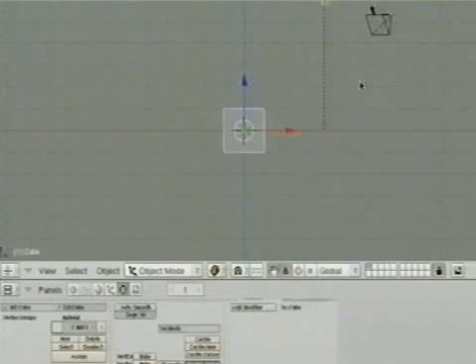In the meantime, starting from this empty blend file. So just to add an armature, and I think I'll do a foot setup, which some people might like.

Yeah, I will. Yeah. Okay, well, I'll do that.

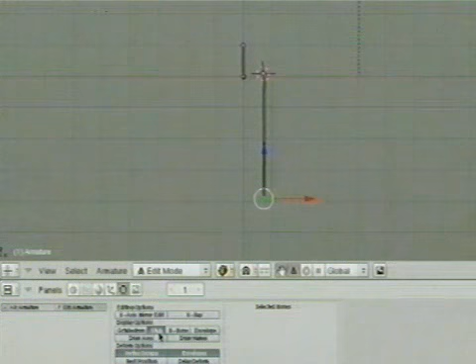Solid drawing modes for bones, and actually several options. So you have stick mode, B-bone, envelope, and that's it. Octahedron is the old way. The only difference is that now it's drawn shaded, and it has the same options for drawing modes that everything else does. So you can make it go back to the old wire way of rendering things.

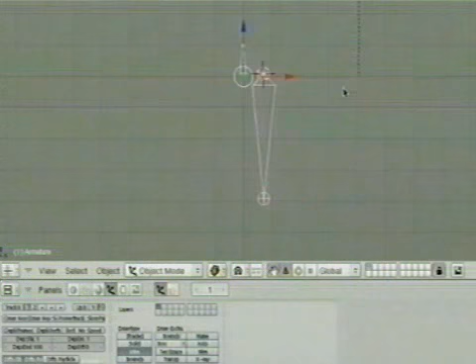You can also have X-ray. You can have X-ray for any object now, not just bones. So you can have X-ray meshes that appear in front of what they're behind if you want. I'll go back to solid for now. X-ray's fine.

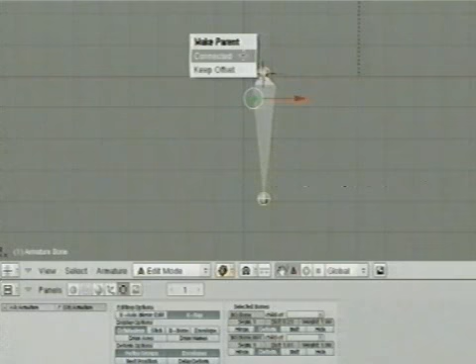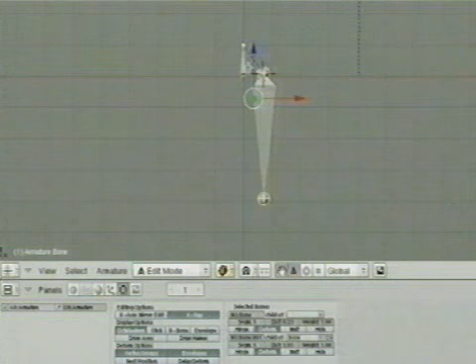So I'm going to make this bone the child of this one by shift selecting it and doing Control P in edit mode, and I want to keep offset. That's also new. So it's as easy to parent things in edit mode in bones as it is in object mode in Blender normally. A lot of the things that we're used to in Blender working for objects now properly work for armatures in both pose and edit mode. So snaps, view centering to a bone, etc. It all works nicely, which is a big plus.

You can also subdivide a bone, which I'll do here. So you can keep on doing it. I'll undo that. So here's our top and bottom part of the leg. I'll go to the side view, and I'll just move the knee a little bit forward.

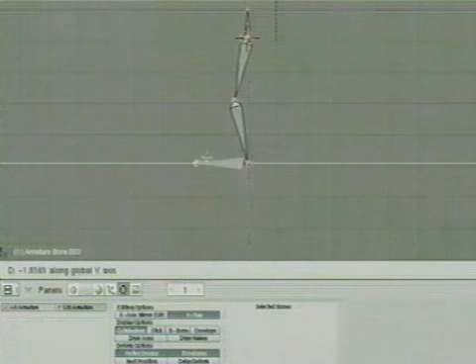So that's the leg part, and we can extrude, and you can use snaps while you're extruding normally. I won't for now, and you can extrude out the foot and extrude out the toe portion of the foot in front. There we go. And so that's the basic geometry bones that the character would have for that leg.

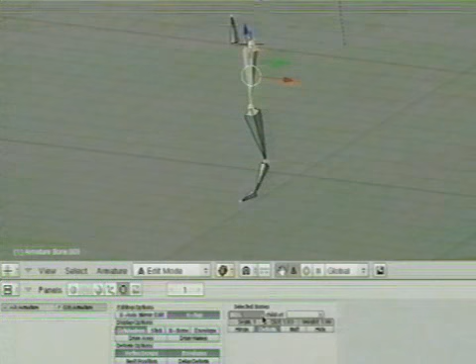You get the upper leg, which I'll call left up leg, and the lower leg. This is the boring part. Left low leg, and the foot stuff. Again, left up foot. Oh, here's something cool actually. You can hit Control C on top of a button, like a text button in this case, and then you can paste that onto a similar button. So you can quickly name things that have similar names.

Yeah, most buttons. You don't actually click on the button to type on it. You just hover the mouse over it. You do Control C, and then you go to wherever you want to paste to. Hover the mouse over it. Control V, and it tacks on the .001 ending. So I can just go and rename this to low foot or whatever I want to call it. Okay, so there's two parts of the foot.

So this is ready to be animated in FK, but we'd like to have an IK chain for the foot. And foot IK is kind of interesting because you want kind of two pivots as you work. You want to be able to stand up on your tippy toes, and you also want to be able to push off with your heel. And so you have kind of two or even three pivot points that you can think of for the foot.

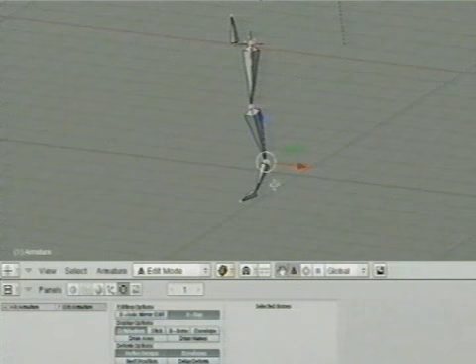You have the ankle here, which pushes the leg up, and then you have, down below it, in this area, the heel of the foot, where your foot kind of pivots off the ground, and then you have the ball of the foot, the middle part, when you're just standing on your tiptoes. And you kind of need to have at least that much flexibility in the feet to have some kind of realistic walk or jump or whatever.

The rig that I use is based off an old one, I think Lubomir did it in Blender, which is just a nice setup for that kind of thing. The one thing that I didn't used to like about Lubomir's setup was if you pulled with IK normally, if you pull the target too far away, the bones try to chase it and stay hanging in space, not able to reach it.

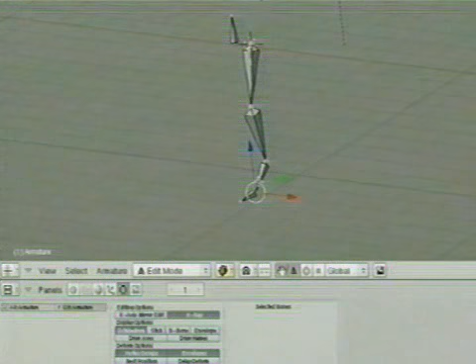In that setup, everything was cool until you pulled the foot out of range, and the foot would move with the target, and the leg would sort of point, resulting in this stretchy ankle thing, which isn't as bad as it sounds, but I kind of liked to have something that didn't do that and also had easy control over everything.

And so I just did a little bit of sort of duplicating and hiding to get the thing to work. So the first thing we want is an IK target for the leg, up to the ankle point. And I'll just snap the cursor here and add a bone. And you notice adding bones is different than it used to be, and it's actually much more intuitive and nicer.

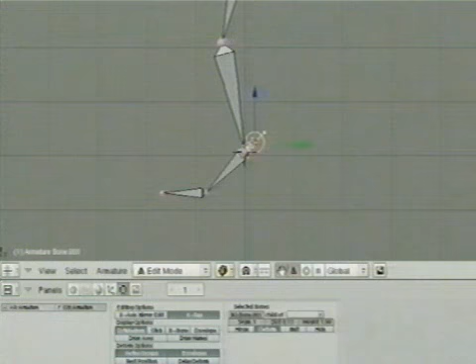And so you can just move this point, which is selected right away. And so this is just the null. It doesn't matter where that point is. So if you go into pose mode, Control Tab, you can select this bone, which is already selected. Then you can Shift select this bone, and you can do Control I, and it automatically will give you the option to add an IK constraint, in this case with the selected bone. And so now this is drawn yellow, showing that it has a constraint on it, that it's IK.

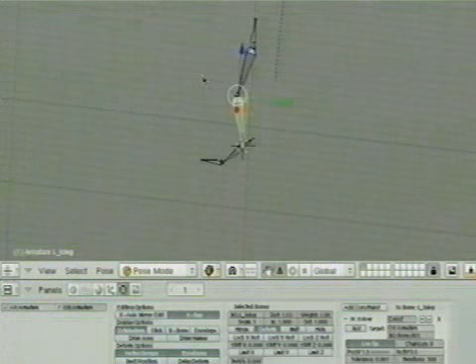And you'll notice there's something called chain length here. And if you look at this dotted yellow line, it's showing where the root of the IK is. And if you have a really big armature, that will go all the way up by default to the topmost parent, even if it's not a connected bone. So IK actually works across bones, even the ones that aren't connected.

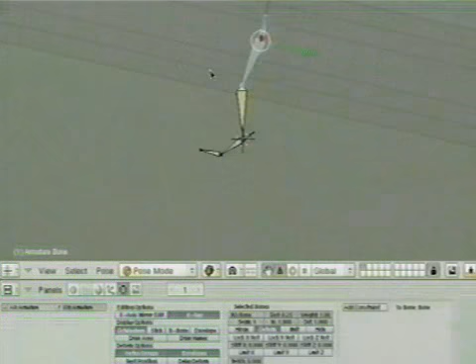Let me just make sure this is child to this, and we'll see that the yellow line goes all the way to this bone here, which means that if I move this, it affects the hips, which is not the old way of doing things. It would have stopped at this bone here, and this bone wouldn't have moved at all. And in this case, I don't really want that. I kind of want to keep my IK just with the legs and have the hips as a normal parent.

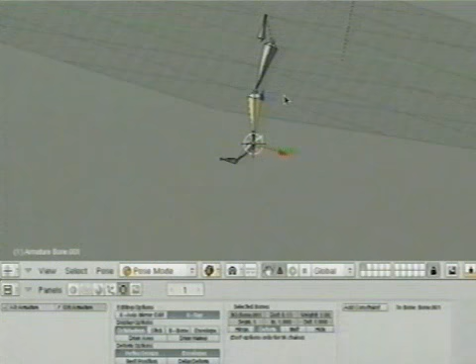And so you can just go into the IK panel here for the constraint and change the chain length, and you can make it end wherever you want. 0 means infinite, 1 means just that bone, and then 2 is that bone and its parents.

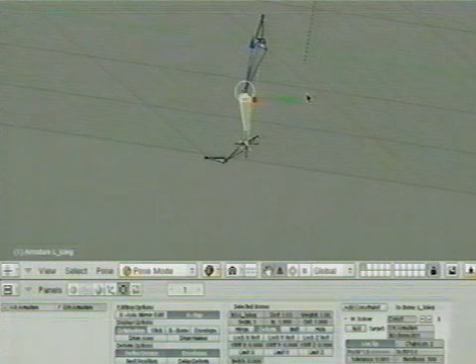You'll also notice what's new is that I don't have a null at the end of my chain for the IK anymore. The IK has a use tip option. We can see checking it on and off. So if you do use tip, it IKs to the tip of that bone, and you don't need a little extra fiddly bone at the end that you're just using as a null. That's nice. So that's the first step.

We have an IK for the foot, which works, as it always has, nicely. Okay, the foot itself we haven't done anything with, so it's rotating around. But the leg and the ankle are working fine. So the next thing, go back into side view, is that we want to pivot off the heel. And pivoting off the heel is as simple as making a bone here at sort of ground level, roughly.

So I can snap my cursor. I can even just copy this bone over and drag it over here, roughly where I want the heel to be. And deselect that ball and just make it going backwards. This is the little heel pivot right here. And I don't want it to have any parent. I just clear parent, like normal in Blender, it just works in here. So let's make sure that worked. Yeah, that didn't work, I guess.

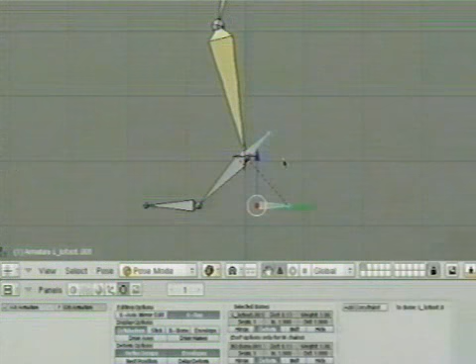Now I want this bone to be parented to this one, so that when we rotate the heel around, it pushes the ankle over. So I'll just do this, and Control P, and I'll keep the offset, and now I have a parenting relationship nicely. And so go back into pose mode, and I can rotate off the heel. Okay, still things aren't working quite right, but we're kind of getting there. So now for the next step.

So, by the way, pose mode is now sort of, once you turn it on, it's always on. So I just hit tab and I'm in pose mode automatically. I can still use Control Tab to turn it on and off, like we used to be able to, but pose mode is automatic. And that's really nice, because if you have multiple things that you're animating in a scene at the same time, like two characters, some objects, whatever,

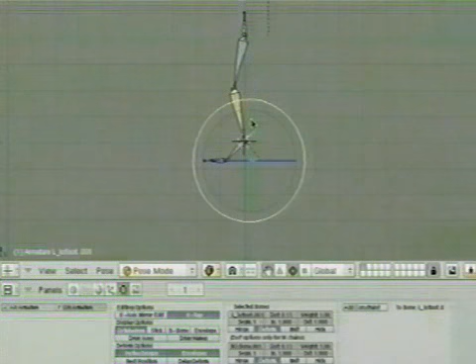you can just click on what you want to move and move it. And you don't have to worry about clicking on the armature, then going into pose mode, and then moving that one, and then having to get out of that mode and click on the other armature and get into pose mode. It's all natural, which is really nice. And if you want object mode for the armature, you can still get it. You can just hit Control Tab and it's object mode again.

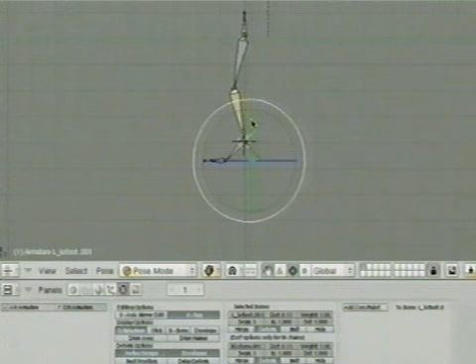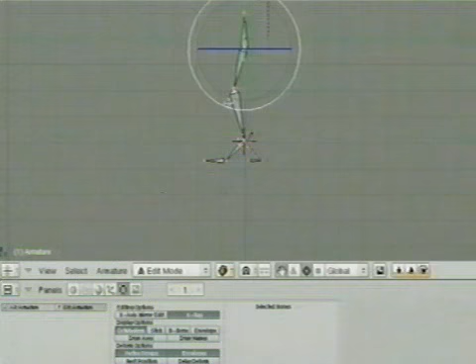Back in edit mode, we'd like to have some control over these two bones so they behave properly. I'm going to move the whole thing down a little bit so you've got more of a bendy leg setup, but that's not really important. The next step is doing something about these two bones so they're not floating around in space. They need to be constrained as well.

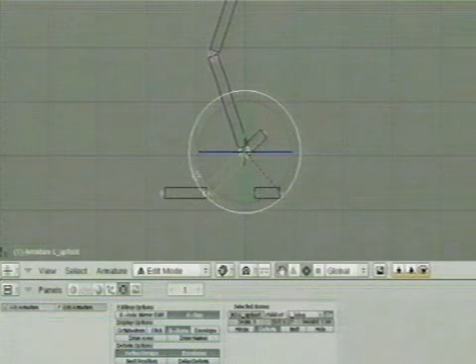I'm going to do a trick. I'll go into B-bone mode here because it makes things easier to see for this step, and go into wireframe. B-bones are kind of cool, you can fatten them and shrink them down just to get a visual effect that you want. It's really not going to affect how the bones work, just how they look.

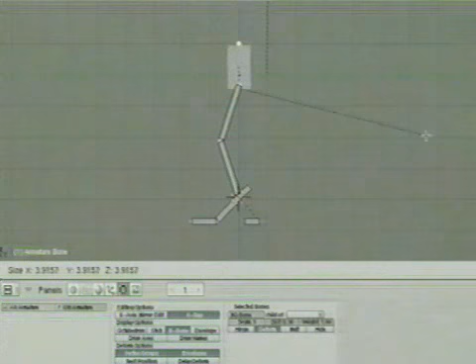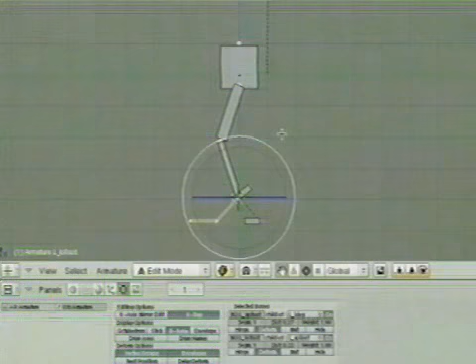For instance, I can make the hips wider by hitting Alt-S and fattening this up. I can make the thigh a bit thicker than the calf. I can shrink these two bones down so they're super thin. That's just for visuals, it's really nice. It's also nice because I'm going to make some overlapping bones right now, and I can make them not stick right on top so you can't see which is which.

So I'm going to Shift D, duplicate these two bones, and then fatten them up. This is very sort of wicked witch stuff.

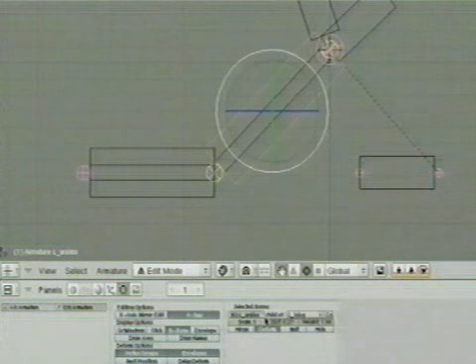So these are the duplicates, and I'll call this one toes, and I'll call this one ankle. I like to pick nice one-word names for the bones that the animators will actually see, and then the ugly compound things get hidden. And here we'll call this foot, which is what it is.

Basically what I want to do is pivot off the ball of the foot, at least optionally. To do that, I'm going to use this bone. It's really pointing the wrong way, because right now its root is here and its tip is here, as you'll see if you click on octahedron mode. So I really wanted this particular bone to not point that way.

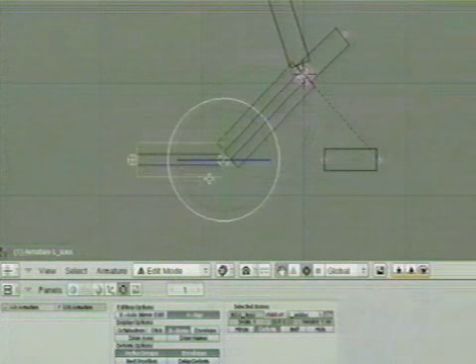So what I'll do is Alt-P and disconnect this bone from its parent so it doesn't move around with it. Then I can pick this guy and move it. I'll go into octahedron so you'll see what I'm doing. I'm going to basically snap this point here to here and snap this point to here, so I'm going to flip this bone around. Just a couple of snaps.

And it's done. Now we have that kind of ball of the foot thing. The foot should move, the ball of the foot should move with the entire foot, so logically it should be parented to this. And we'll keep the offset. The parenting lines are nice, they reassure us that something happened.

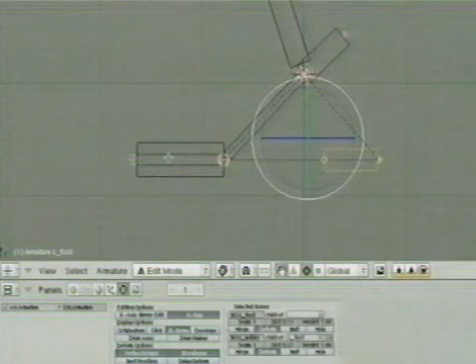And if you go into B-bone, that was just silly. This guy, I think he actually already is a parent, he already is a child of that, which is okay. So let's go back out of edit mode.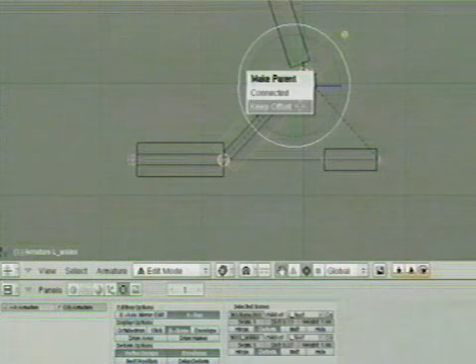Oh, one last thing I'm going to do. We're going to pivot this guy to pivot on the ball of the foot and push the ankle up. So the IK target that is at the ankle should really be a child of this bone, so it pivots with it. That's the other parenting operation I'm going to do here. It can be connected or offset, it really doesn't matter. I'll make it connected for now.

Okay, I'll do a little example for you. If you add the bone and hit Control-P, here's keep offset, it just makes a parenting relationship. Undo that. And if I do Control-P and choose connected, it connects it to it. Now if I go into it, it's an FK child of that bone, so it can't be moved anymore, it can only be rotated.

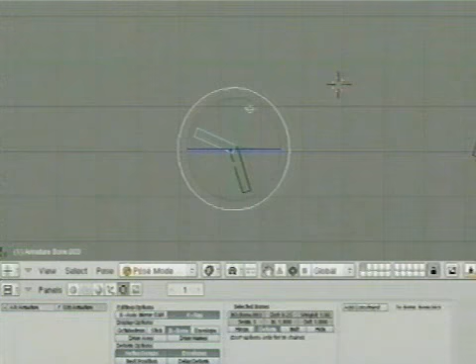In this case, it doesn't matter because we're not even going to see that bone ultimately. It just has to be a child. So, did I actually do that?

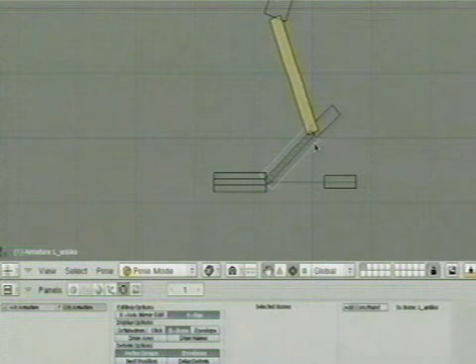Okay, so if I rotate this bone in pose mode, it now rotates. It does this pivoting thing here. So now we just have to get this guy to behave, do something about this guy, and we're done.

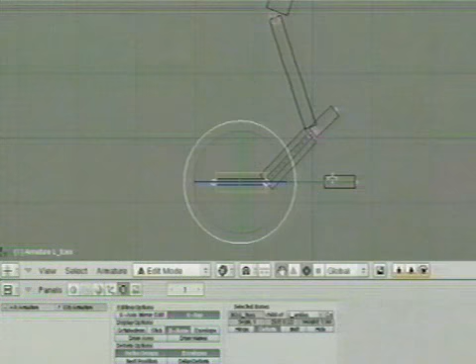Okay, so the next thing to do is parent this to this so it doesn't rotate around with that. So now it's behaving. So now I can rotate the ball of the foot and the front part stays sitting down on the ground where it should. And then the other thing is to constrain these guys so the rotations match, and we're done.

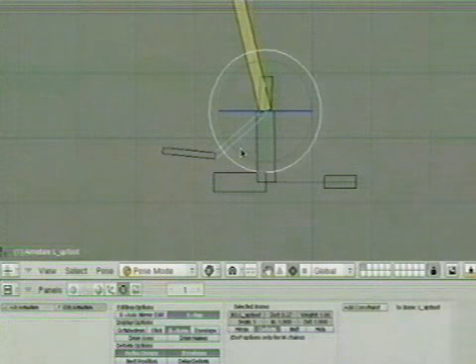So this bone right here, you could do even an IK constraint, I suppose, to this one. You actually have a whole bunch of options here. The order is target bone when you're doing this.

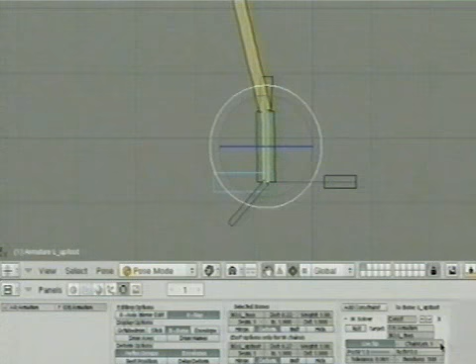And then this chain length thing is the thing that's making things funny. So we'll just give it a chain length of 1. So it's the root, it's a 1 bone IK chain. And this guy can have a copy rotation constraint.

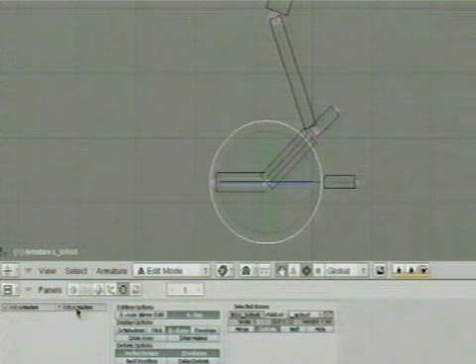And it's the armature's default name. So what I could do here, show you copy stuff. I tabbed into it so I get the armature object name here, and I can just copy that, Control C. And then I go back here and I can Control V that here.

And then I can select this bone right here, and Control C, and then select this bone and paste its name here. Didn't actually have to type anything. So that's basically it, that's the foot setup.

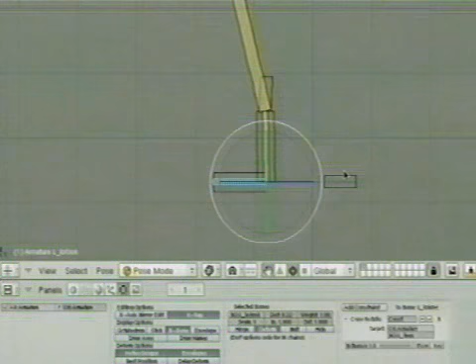So now I can move the foot as a chunk. I'll hide this bone because I don't want to really do anything with it. And basically, the intent is that you rotate these two bones. You don't translate them ever, you just rotate them around. And they give you that little extra ability to pivot on the ball of your foot.

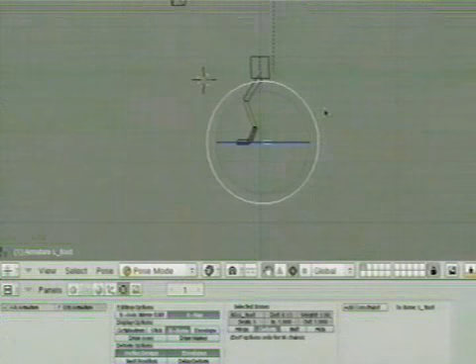And if you pull it too far, you don't break the chain. It just stays, the geometry bones stay connected to each other and you don't get anything nasty. So it's pretty much my existing foot setup that I've used since before this version, but it's using a few new features so I can do it with less bones and in less amount of time than before.

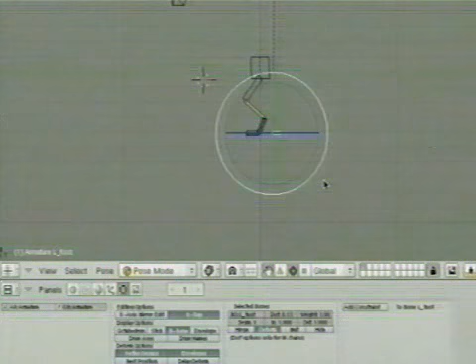Sometimes if you haven't rigged for a long time, you might forget and then have to think about it a little bit. But it's not too hard to just sort of recover it. It's pretty nice. So that's a foot setup.

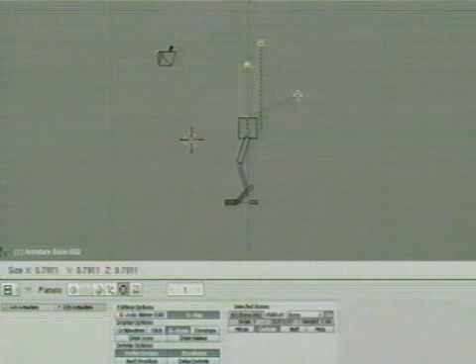That's kind of cool. Just to show you a few new features, I can extrude this bone up, and we'll do some kind of spine thing for the character. So we select this bone. I'm going to turn off the manipulators right now because they're annoying me. Shrink it down, and let's maybe make a neck and a head.

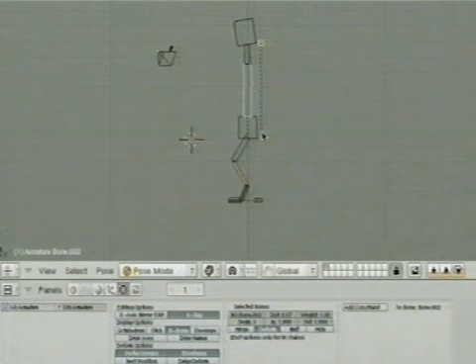I'll make the neck narrower and make the head fatter. And I just want to show you something with the B bones. The bones, B bones or not, can be segmented, but you'll only see the segmentation when you're in this drawing mode. And you just notice that there's a number of segments right here, and when you click on it, you can see that the bone has more segments, and you can do that with the neck.

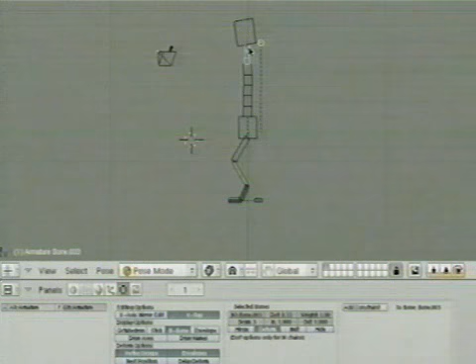So you have these multi-segmented bones, and the cool thing about them is that they're Bezier curves, and they try to sort of smooth the rotations along the chain. And so when I rotate the neck around in this case, it sort of keeps the curvature intact.

It's been a comment that I've heard that, oh yeah, but you're not really preserving the length when you do this kind of curve thing, and that's true. So if you have one long bone and you do some really wacky rotations, you get a curve that's really big, and so the spine's sort of stretched out.

But you can remedy that by either having more bones if you want to do excessive rotations, and I think it's close enough. But I'm not really into super precision. So if it's close enough, I'm happy.

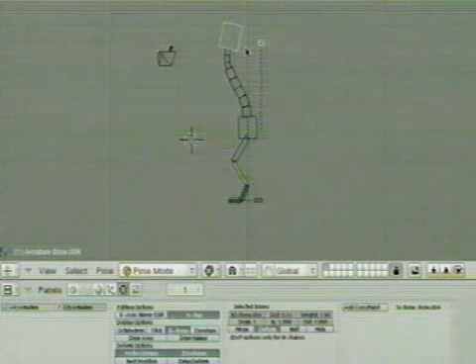It does use about, I think, 9 bones for each spinal bone. So it's really, really so cool to look at, but a little bit more complicated than what I'm showing here. Just so people often accuse me of having too many bones and complex rigs, and that's not true. That guy's the master of that.

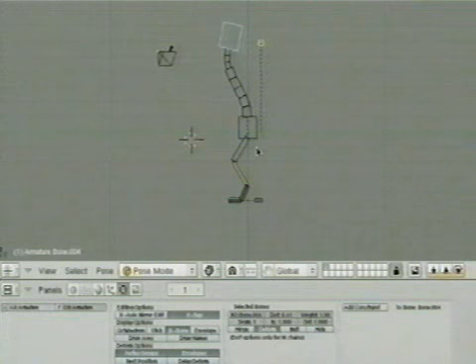So another cool thing I'll show as far as new features: the B-bones can deform geometry in this smooth fashion as you'd want. They probably take longer to calculate because of that, but it really isn't too bad, and I haven't noticed it actually. Having a few B-bones in a model didn't seem to make it noticeably slower on my system.

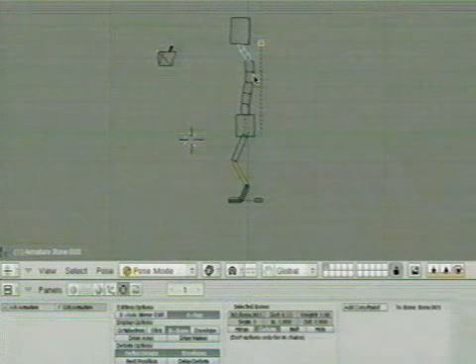The other thing about them that's kind of interesting is that if you have default rotations - and this is not something I like, this is something that happened and I'm not really happy about it - because I usually like to model my characters not in a straight line like that, with already having bends in them. What happens is the B-bones will automatically smooth that, so you'll model your character and rig it, and if you do this system, you get this default pose deformation. It deforms right away, even from your model version.

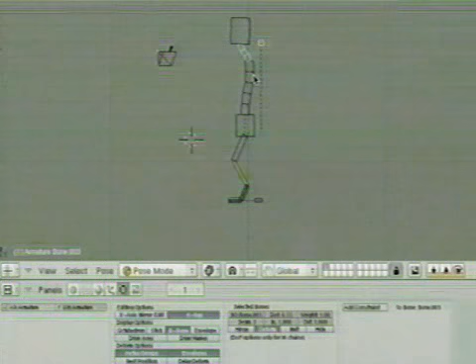It's just something to notice. So if you work so hard on getting the curve of the back and the neck just right in your modeling, and you make the bones and rig it, it goes whoop, and it's just a little bit off now from what you did. I can think of only two solutions: one is to model it in this weird straightened out pose, or maybe model it normally and then pose it before you rig it - that's an extra step. The other option is don't care.

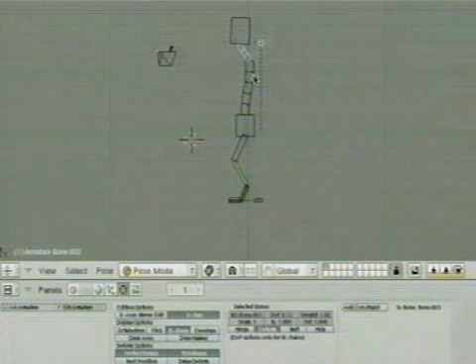The other thing is you can now edit, thanks to the modifier stack - I'll show that in a bit - you can edit a mesh deformed by the armature. So you could rig it, and then say, okay, I don't quite like that, I'll tweak it back so it looks nice deformed. There's just a slight problem with that, but really for this setup it's okay.

The slight problem is that while you can see it and edit it in its deformed mode, you're really moving the original points wherever they were. So if there are extreme deformations going on and everything's twisted around like crazy by the armature, you can move the point to the left and it'll fly out to the corner of the screen, because that's where it really was before you deformed it. But in this case it's not really going to be that bad. You'll notice the point isn't moving quite where your mouse cursor is, but it's pretty controllable.

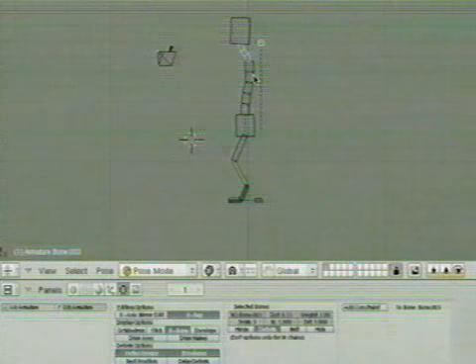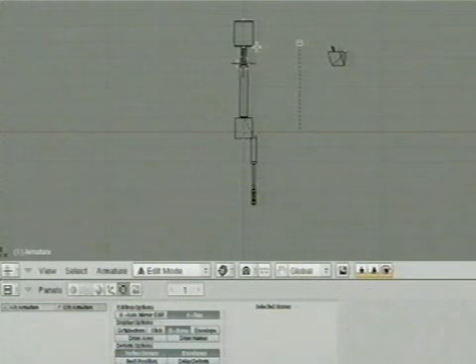So that's that. Another thing I want to show about these B-bones that's really cool is they're really nice, actually, even for straight bones - even maybe nicer, I don't know. So I'll add a bone for a shoulder, and extrude out his arm, and subdivide it so it's two bones. I had only the point selected, that's why it didn't work.

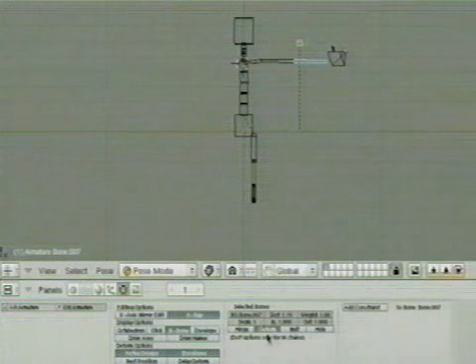So the cool thing about it is, in a human being, you can twist your joints, and when you twist your joints, it doesn't just twist at the joint and fold over itself like it usually does with bones. It sort of transfers the twist along your arm, and you can use the B-bones for that - you can just give them some segments. I'll do 4 and 4, or 5 maybe, so we can see what's going on. Now I'll show you, if you just do that and rotate your arm, you get these sort of nice bendy arm setup.

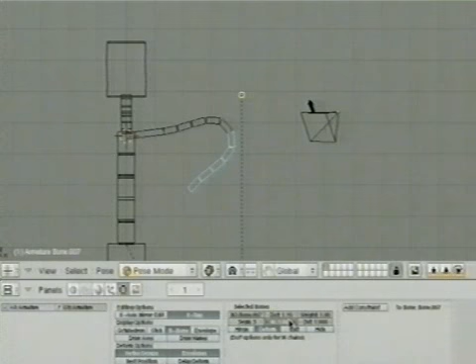Which, for old cartoon styles, is cool too - you had those old cartoons with the sort of rubber hose animation, they called it. They did it to get fluid motions, and they hadn't quite figured out how to break joints properly. But you don't have to have that - you can take these Bezier handles. This in and out numbers are basically the length of the Bezier handles on each side of the bone, and if you just make that 0, it stays straight.

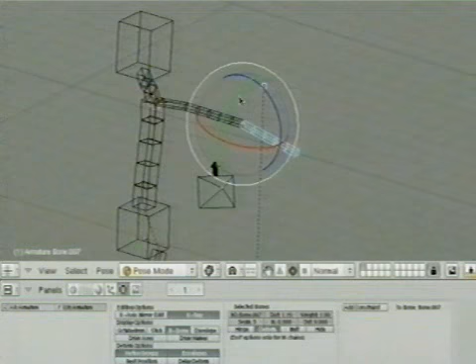So it just works like a regular bone now. But just to show you what happens when I twist it, we'll go into this widget so I can twist it on the y-axis, and let's zoom in. When you twist, it smooths out the twist along the length of the bone. So that's really awesome.

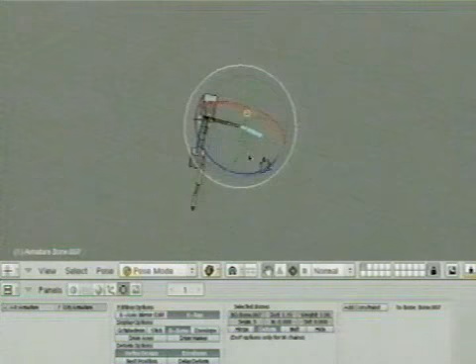So that's just some cool things that sort of happen to armatures, and just a quick example. I think I don't know if I'm out of time.